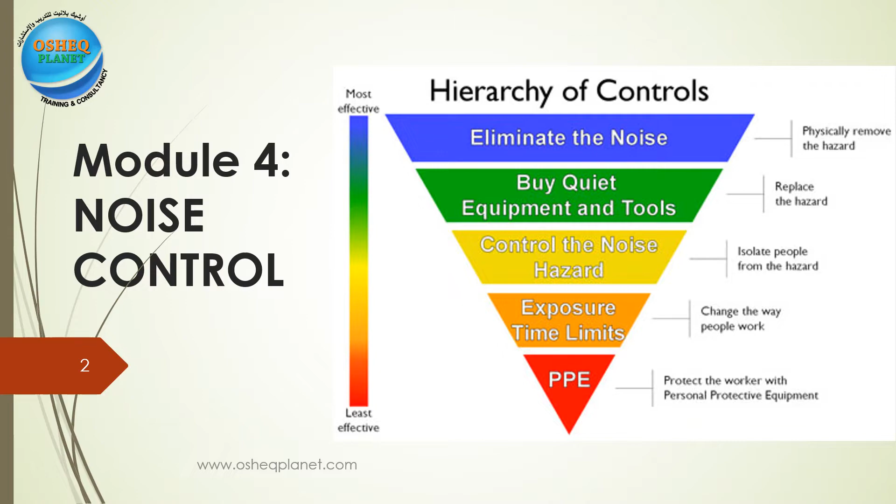Now let's explore the control measures. As per the National Institute for Occupational Safety and Health, NIOSH, the hierarchy of noise controls are: eliminate the noise source by physically removing the hazard, and this is considered the most effective method of control. Buy quiet equipment and tools, named as replace the hazard. Control the noise hazard by isolating the source or the exposed people. In addition, change the way people work by reducing exposure time limits. And finally, the least effective method is using personal protective equipment. Let's discuss these control measures in detail in this module.

Background. Noise controls are the first line of defense against excessive noise exposure. The use of these controls should aim to reduce hazardous exposure to the point where the risk to hearing is eliminated or minimized. With the reduction of even a few decibels, the hazard to hearing is reduced, communication is improved, and noise-related annoyance is reduced.

There are several ways to control and reduce worker exposure to noise in a workplace, as a threat that affects the health of workers and their level of productivity, including, for example but not limited to, removing the risk of noise from its roots, or reducing it to legally permissible levels, or finding engineering solutions to deal with it in the workplace. All in all, the first of these procedures is to identify and analyze the risks in the place, and then start finding solutions for them.

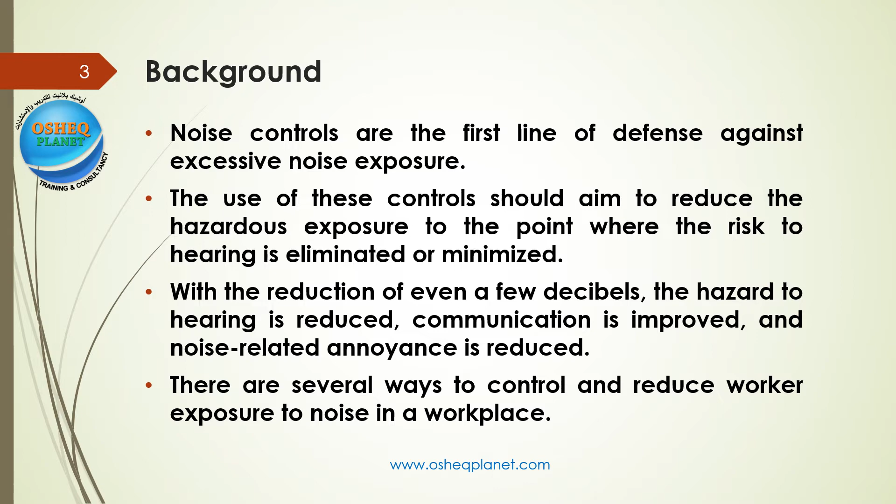The less workers are exposed to noise as a danger among other dangers, the less they complain of stress and nervousness during work, for example. And this is reflected positively on the productivity of workers. The cost of healthcare for them is also reduced, as a facility may otherwise be forced to treat them for the effects of exposure to noise in the long term.

Eliminating or reducing excessive noise at work is not simply a legal responsibility for employers, it is also in an organization's commercial interests. The safer and healthier the working environment, the lower the probability of costly absenteeism, accidents, and underperformance.

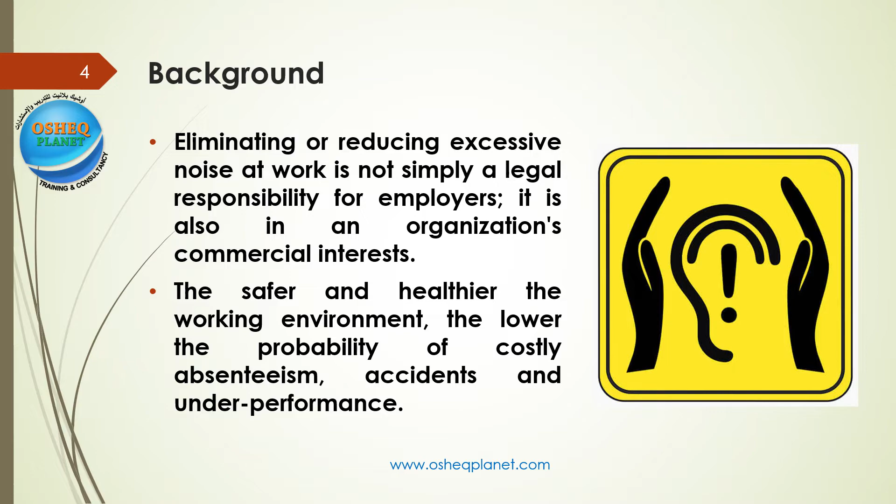Assessing the risks. The degree and type of assessment will depend upon the scope and extent of the problem in the workplace, but all risks arising from noise should be considered. For example, the ways in which noise may increase the risk of accidents in a factory should be considered along with the risk of noise-induced hearing loss, NIHL.

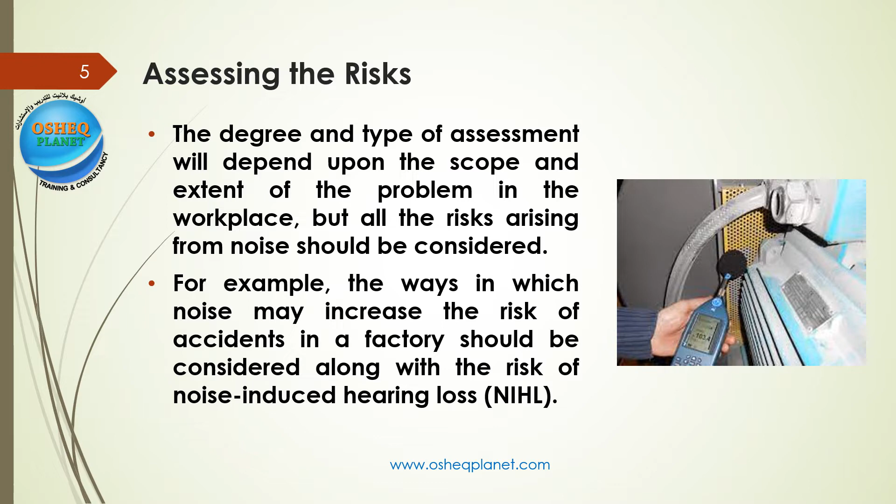Therefore, those who analyze the risks must be trained on how to implement this in the correct way and put the recommendations into practice. In addition, the management of the facility must be confident in these procedures and the importance of occupational safety and health, and that in the end it will be in the interest of the employer.

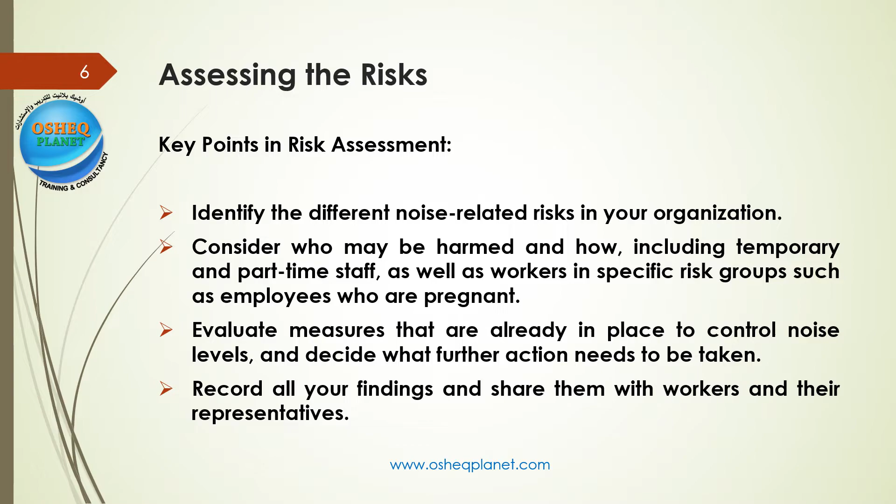Key points in risk assessment. Identify the different noise-related risks in your organization. Consider who may be harmed, and how, including temporary and part-time staff, as well as workers in specific risk groups such as employees who are pregnant. Evaluate measures that are already in place to control noise levels, and decide what further action needs to be taken. Record all your findings and share them with workers and their representatives.

Noise hierarchy of control measures. As we introduced earlier, there is a hierarchy of control measures that can be followed to ensure the health and safety of workers.

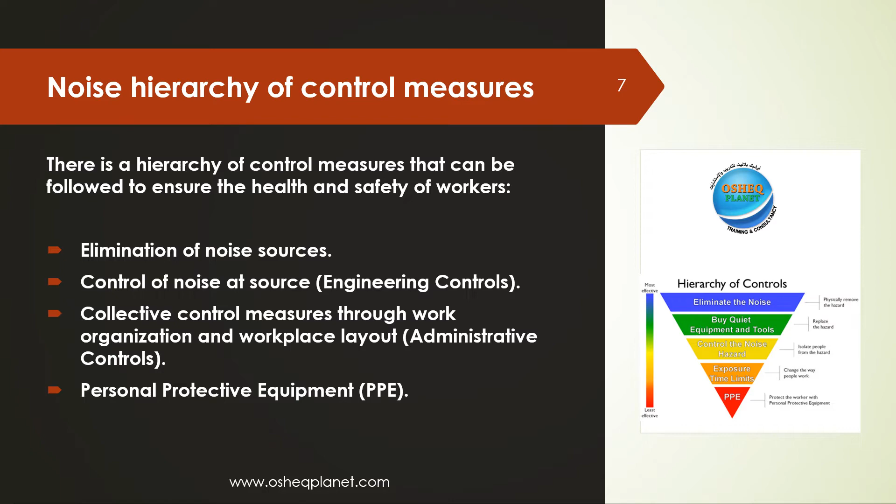Elimination of noise sources - in that case, there is no noise hazard. Control of noise at source through engineering controls - these techniques are used in different methods and ways. Collective control measures through work organization and workplace layout - administrative controls. At the final stage, use personal protective equipment, PPE. Let's explore all these in more detail.

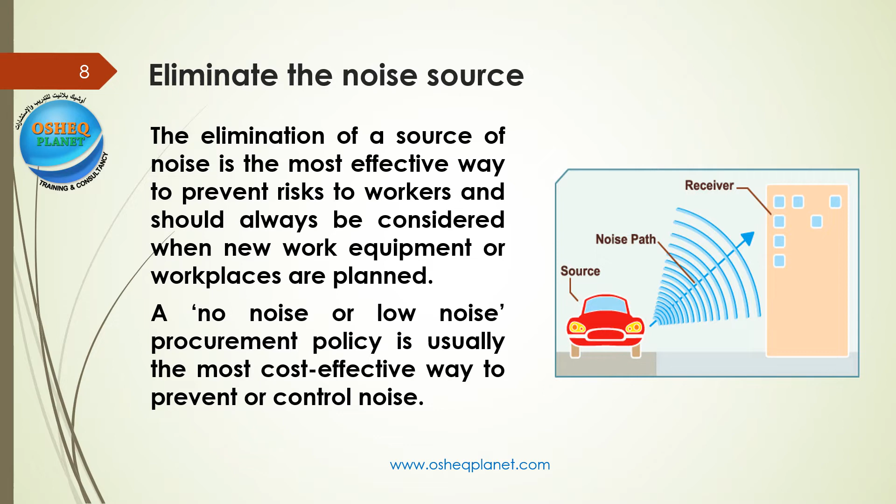Eliminate the noise source. The elimination of a source of noise is the most effective way to prevent risks to workers, and should always be considered when new work equipment or workplaces are planned. A no-noise or low-noise procurement policy is usually the most cost-effective way to prevent or control noise.

Control of noise at source. The reduction of noise, either at its source or in its path, should be a major focus of noise management programs, considering both equipment and workplace design and maintenance, given that reduced sound exposure levels are available and technologically feasible for most noise sources.

Engineering controls involve modifying or replacing equipment or making related physical changes at the noise source or along the transmission path to reduce the noise level at the worker's ear.

It is possible to purchase equipment or devices that emit a low level of noise. It is also possible to set conditions for the factory for the purchased machines so that these machines emit a specific level of noise through the specifications of the user's requirements. This is named User Requirement Specifications, or URS, so as not to increase the noise emission from them.

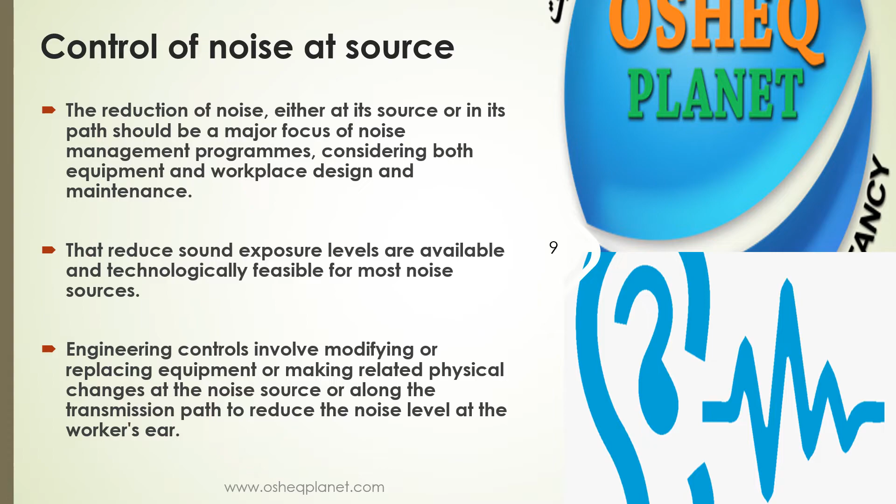Let's explore some engineering controls examples. Isolation of the source, via location, enclosure, or vibration damping using metal or air springs or elastomer supports. Reduction at the source or in the path, using enclosures and barriers, mufflers or silencers on exhausts, or by reducing cutting, fan, or impact speeds.

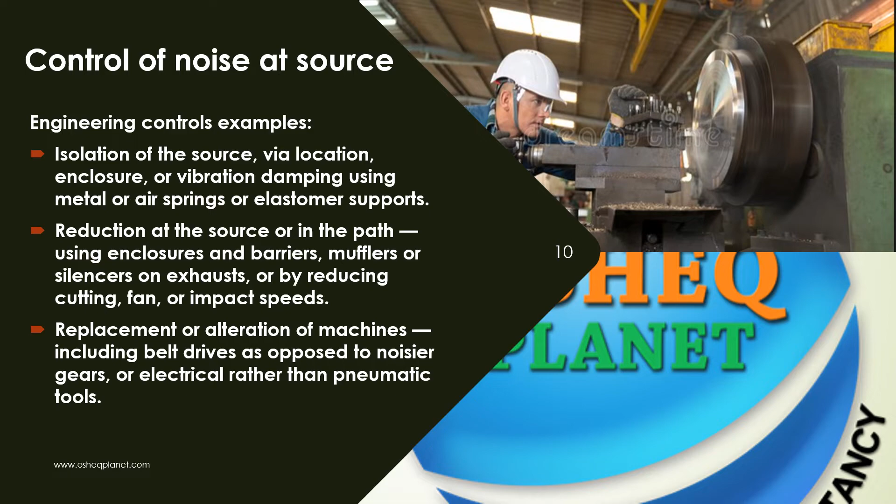Replacement or alteration of machines, including belt drives as opposed to noisier gears, or electrical rather than pneumatic tools. As you can see, solutions to reduce noise emission from machinery or equipment are possible, provided that the administration is committed to occupational safety and health.

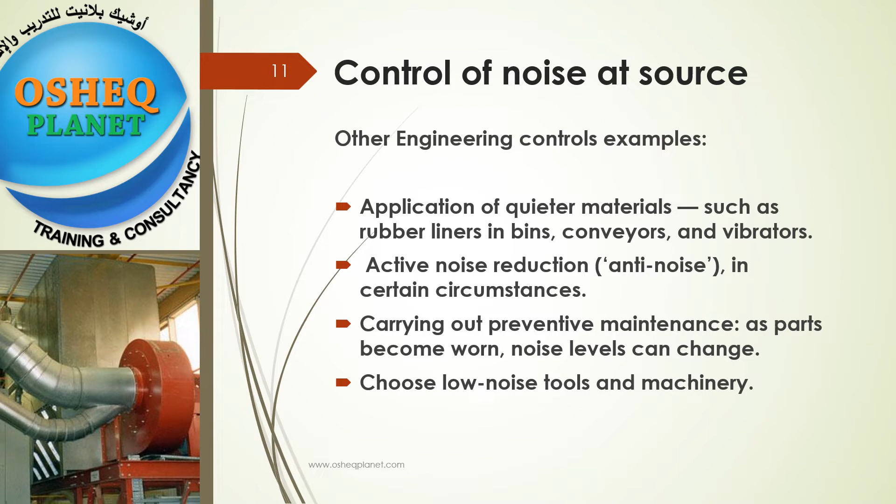Other engineering controls examples: application of quieter materials, such as rubber liners in bins, conveyors, and vibrators. Active noise reduction, or anti-noise, in certain circumstances. Carrying out preventive maintenance, as parts become worn, noise levels can change. Choose low-noise tools and machinery.

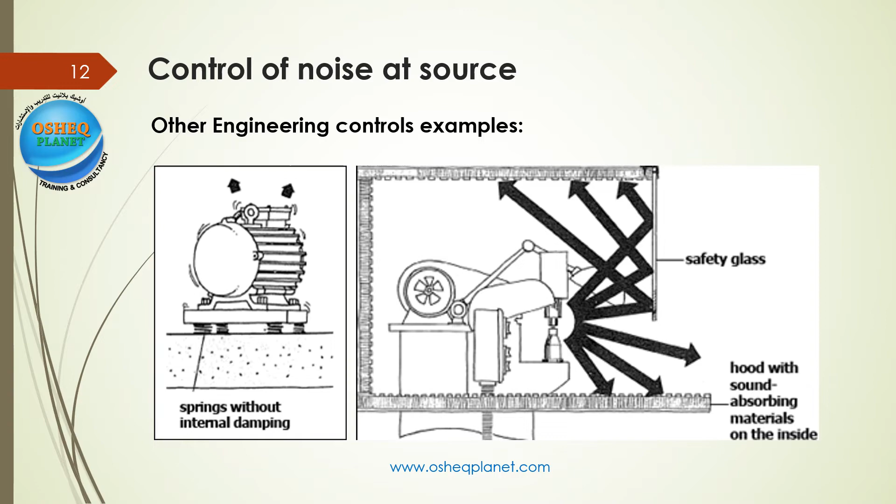The attached pictures give a clear example of how to isolate the machine through engineering controls, to control the emission of noise through isolation with glass, and the other by installing springs at the bottom of the machine to absorb the noise emanating from it.

Collective control measures. Where noise cannot be adequately controlled at source, further steps should be taken to reduce the exposure of workers to noise. These can include changing the

workplace sound absorption in a room. For example, a sound-absorbing ceiling can have an effect on reducing workers' exposure to noise.

Work organization, for example, using working methods that require less exposure to noise. Work equipment: it depends on how work equipment is installed and where it is located, which can make a big difference to workers' noise exposure, and the amount of time that employees spend at a high noise source.

In addition, it is also possible to control exposure to noise by reducing workers' exposure to it by following a shift system, so that the presence of workers in high noise places is regulated for the least possible time during the day.

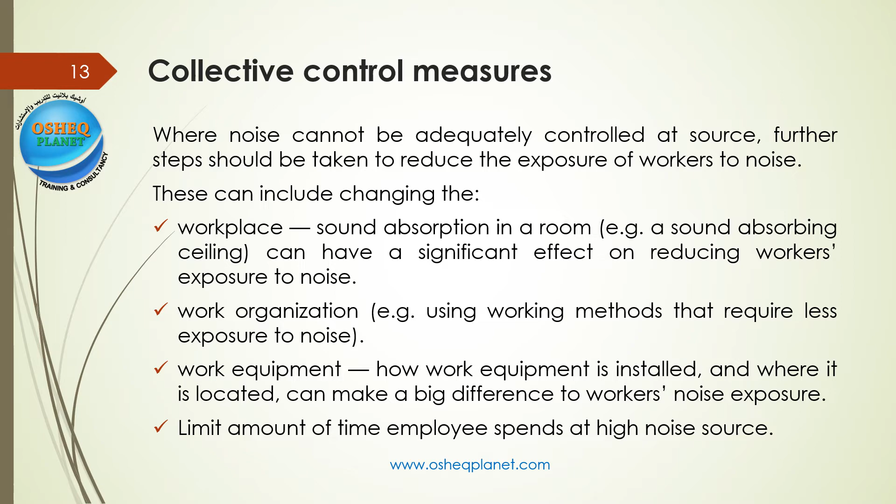Other collective control measures: the ergonomics of any noise control measure should be considered. When noise control measures create difficulties for workers to carry out their jobs, they may be modified or removed, rendering them ineffective.

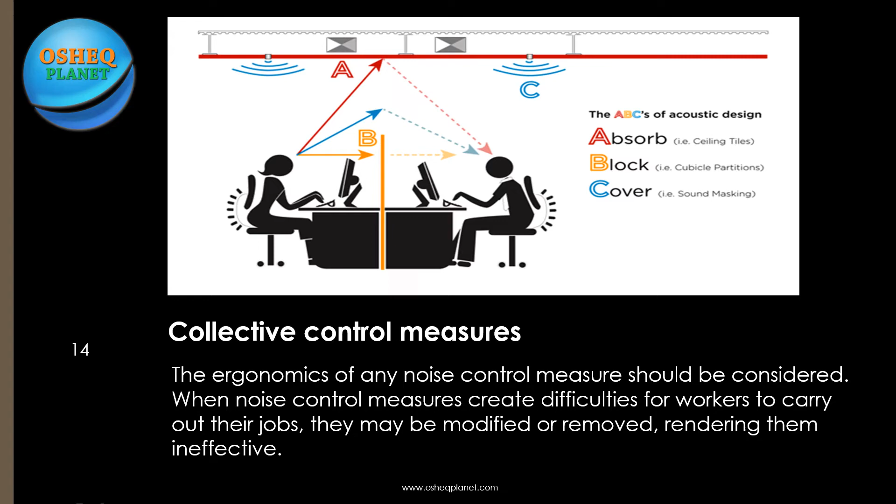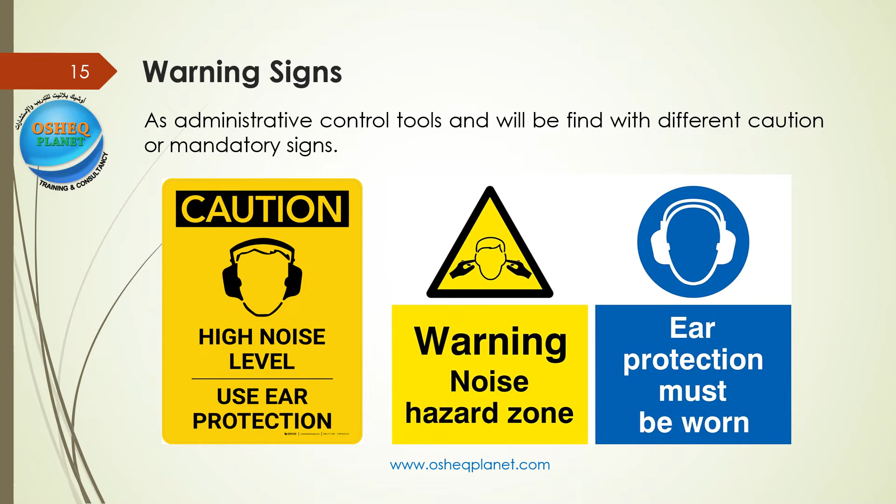Warning signs. These are administrative control tools, and will be found with different cautions, for example, high noise level, or mandatory signs such as ear protection must be worn. Warning signs remind workers of the precautions that must be taken in different places to prevent danger to those working there. This is also one of the requirements of the laws related to preserving the safety of workers.

Information and training. The employer must provide training for workers so that they can identify risks in their workplaces and provide ways and procedures to easily report them. Also, the employer must find channels through which employees can follow up on the steps that have been implemented or achieved to treat the risks that have been reported.

Workers should receive information and training to help them understand and deal with noise-related risks. This should cover the following: the risks faced, as well as the measures taken to eliminate them, the results of the risk assessment, and any noise measurements, including an explanation of their significance.

Noise control and hearing protection measures, including PPE. Why and how to detect and report signs of hearing damage. When workers are entitled to health surveillance, and its purpose.

Regularly monitor the risks and control measures. Employers should check regularly that the measures in place to prevent or control noise are still working effectively.

Depending on their noise exposure, workers have a right to appropriate health surveillance, where health records must be kept and information provided to the employees. The knowledge gained from the surveillance should be used to review the risks and control measures.

Follow-up of the health status of the workers gives positive indications of the extent of the employer's concern for the health of the workers, which may increase the improvement in their psychological state.

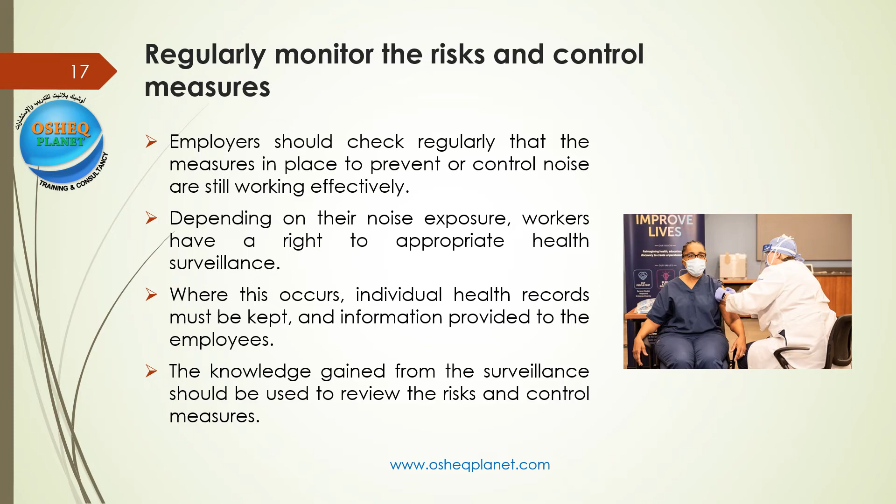Employee involvement. Consulting the workforce is a legal requirement, and helps to ensure that the workers are committed to safety and health procedures and improvements. Using their knowledge helps to ensure hazards are correctly spotted, and workable solutions implemented. Worker representatives have an important role in this process. Employees must be consulted on health and safety measures before the introduction of new technology or products.

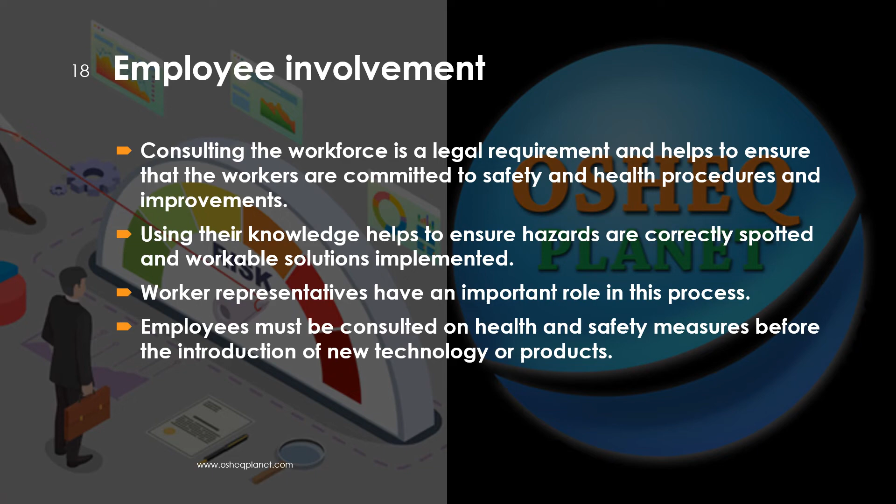Personal protective equipment, PPE. The use of protective equipment/personal safety is the last resort to protect workers from work hazards, in contrast to what some people think is the first safety option for them.

Personal protective equipment, PPE, such as earplugs and earmuffs, are used as a last resort after all efforts to eliminate or reduce the source of the noise have been exhausted. Store hearing protection in easy-to-access areas. The most important safety instruction for the PPE is how to wear and use it.

Issues to consider when using PPE include making sure the PPE chosen is appropriate for the type and duration of the noise, and it should also be compatible with other protective equipment. Employees should have a choice of suitable hearing protection so they can select the most comfortable solution. Many workers, such as drivers, police officers, pilots, and camera operators, need communication earmuffs or headsets, often with active noise cancellation, ANC, to ensure clear communication and minimize accident risks.

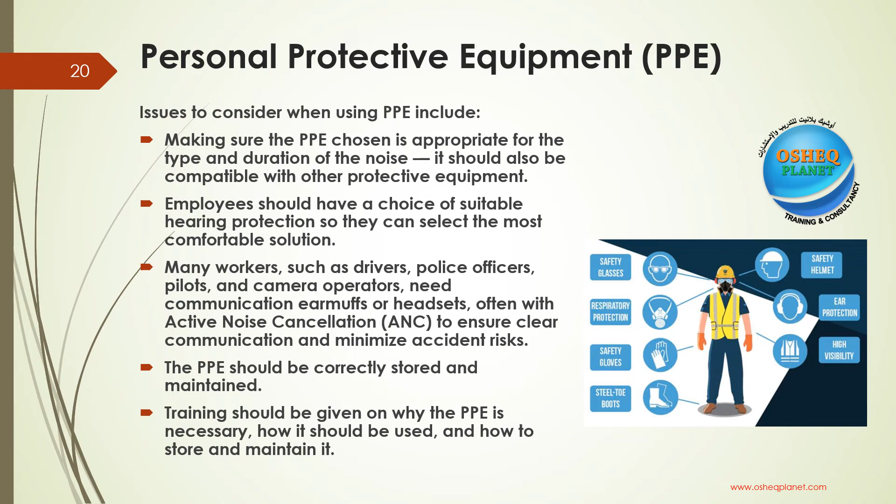Also, practical training must be provided on its correct use and identification of the limits of its protection for the user, how to test it from damage, and how to clean it constantly.

Let's discuss one important factor for using the PPE, which is the noise reduction rating or NRR. The current NRR is a single number, NRR 28, 30, etc. NIOSH recommends derating hearing protectors by a factor that corresponds to the available real-world data. Specifically, NIOSH recommends that the labeled NRRs be derated as follows.

Earmuffs, subtract 25% from the manufacturer's labeled NRR. Formable earplugs, subtract 50% from the manufacturer's labeled NRR. All other, subtract 70% from the manufacturer's labeled NRR.

The American National Institute for Occupational Safety and Health recommends when determining the protection value that the hearing protectors will provide by subtracting a quarter from the noise reduction rate in the case of earmuffs. While OSHA subtracting 7 from the noise reduction rate, NRR, and then dividing the result by 2 to get the value that the hearing protectors will provide in decibels.

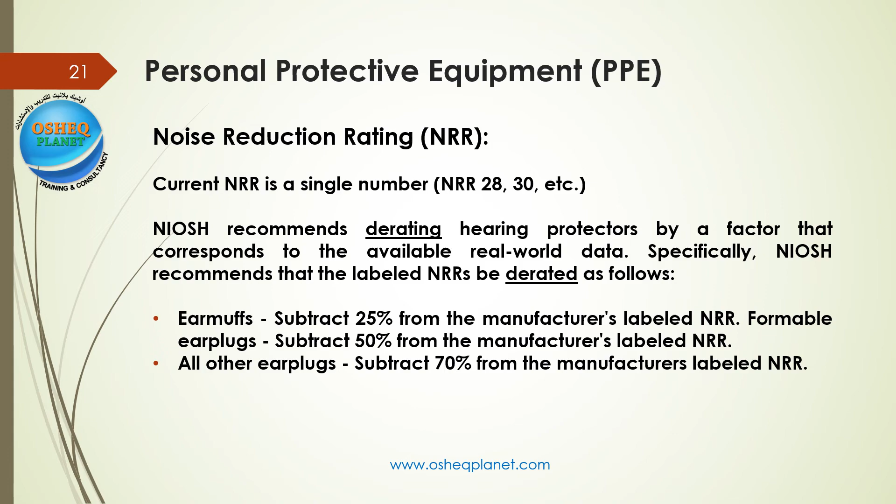Now let's check your knowledge. Read the questions carefully and write your answer in a separate sheet to check your knowledge at the end of the part.

Question 9. The personal protective equipment, PPE, is the first tool in controlling the exposure to noise. 1. Is this statement is true? 2. This statement is false.

Question 10. Sound-absorbing materials on the inside is example of engineering controls. Is this statement is true or this statement is false?

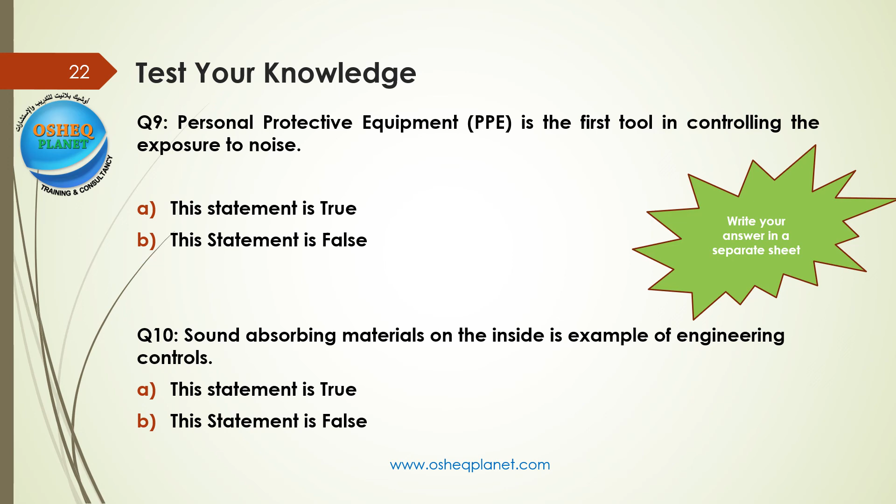Question 11. Warning signs is example of 1. Engineering controls. 2. Control at source controls. 3. Elimination controls. 4. Administrative controls.

Question 12. Earmuffs, subtract how many % from the manufacturer's labeled NRR? 1. 50%. 2. 75%. 3. 25%. 4. 10%.

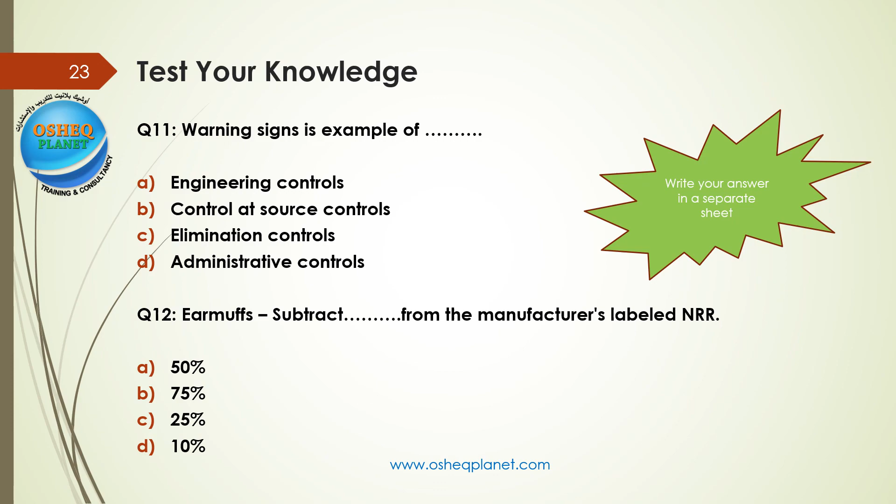It's your turn now to check your answers. Question number 9 is false. The personal protective equipment, PPE, is not the first tool in controlling the exposure to noise. It's the last control defense to protect you from hazards.

Question 10 is true. Sound-absorbing materials on the inside is example of engineering controls. Question 11. Warning signs is example of administrative controls, so the correct answer is number D. Question 12. Earmuffs, subtract 25% from the manufacturer's labeled NRR. The correct answer is number C.